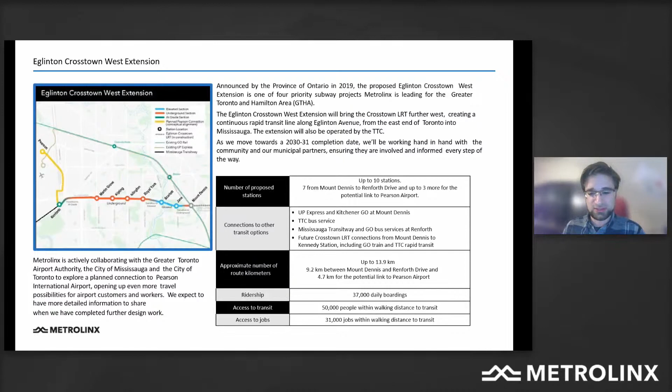So Chris, you can take us to the next slide.

One thing I didn't mention is that these are big projects, they do take a while to construct. Our planned opening date for the line is 2031. This gives you a sense of some of the timing. We've already passed a number of our milestones. Excited to announce that work on the tunnel contract, which is the tunneled section from Renforth through to just before Scarlett Road, we are just working with the final contractors to award that contract.

We expect work to begin at the launch shaft, the place where we insert the large tunnel boring machines into the ground, which is at Renforth, right at Renforth and Eglinton. We expect that if you go out there, probably at the beginning of summer, late spring, you'll start to see more and more activity as work begins on the tunnel launch shaft, working towards completion of that tunnel in 2025.

The next piece of work is building the stations, fitting out, adding the tracks and all the systems to make this a functioning rapid transit line, really getting started in earnest in 2025 towards that 2030-2031 opening date. Next slide, please.

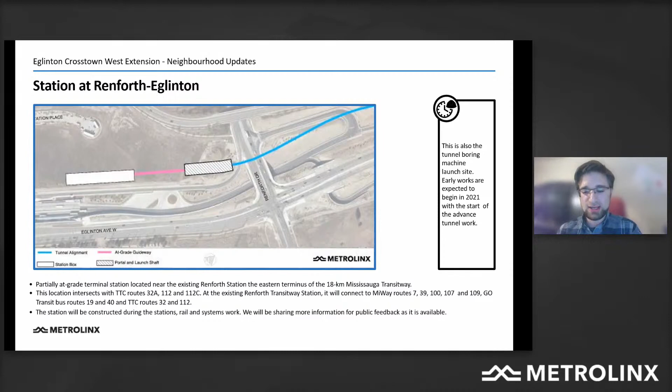In terms of this slide, this is at Renforth and Eglinton. This is where the launch shaft is for the tunnel boring machine, as well as the station that will connect very nicely to the MiWay buses, the TTC buses, and the GO buses, to be able to connect to or from broader locations in Mississauga, Brampton, and beyond. Next slide.

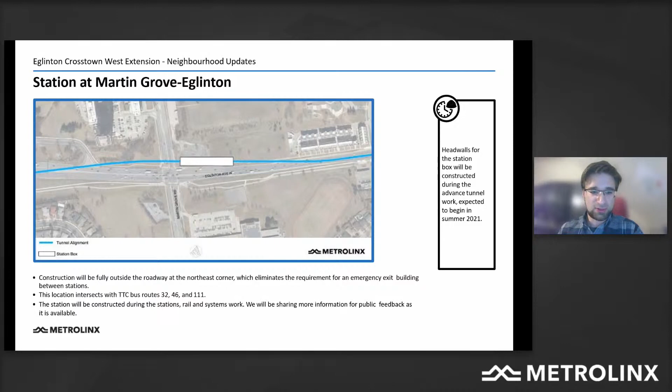So the blue line represents the tunnel, and that white rectangle represents where we'll be building the station box. This is Martin Grove. If you can take us to the next one.

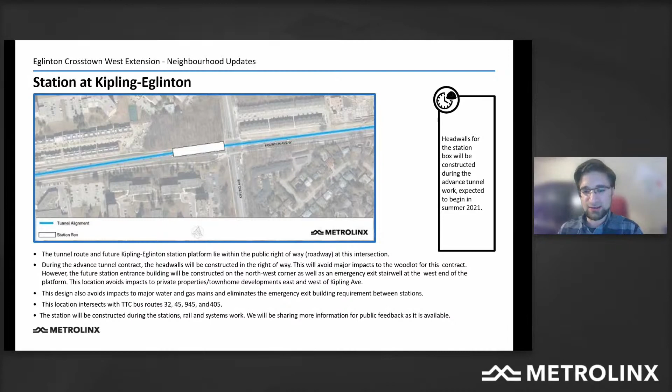At Kipling and Eglinton, this is the one location among the underground stations where the station box will be under the road. This is because of the adjacent townhomes and development, so we don't want to impact those through the tunnel construction. We keep the station box there, right under the road, just west of Kipling. So we can keep going.

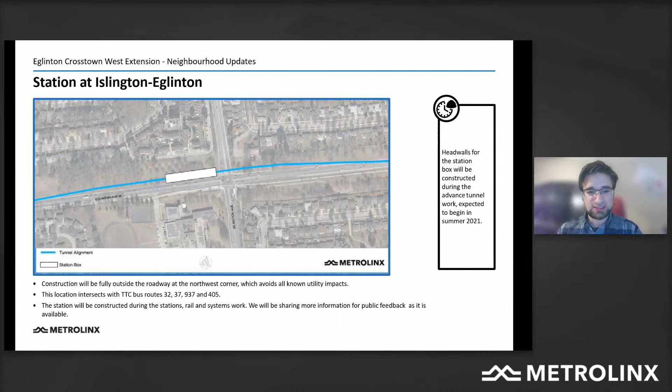This is at Islington and Eglinton, where we're planning to put the station box on the northwest corner. In each of these cases, we're doing work to make sure the stations are well connected to the surrounding development and to the north-south bus service. There are important TTC bus routes on all of these north-south streets, and we want a really good connection between the buses and the rapid transit stations so it's easy for riders to go between both services. This is Islington, and Chris, you can take us to the next one at Royal York.

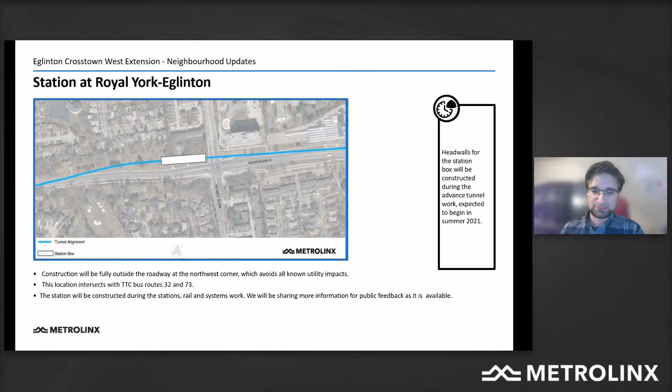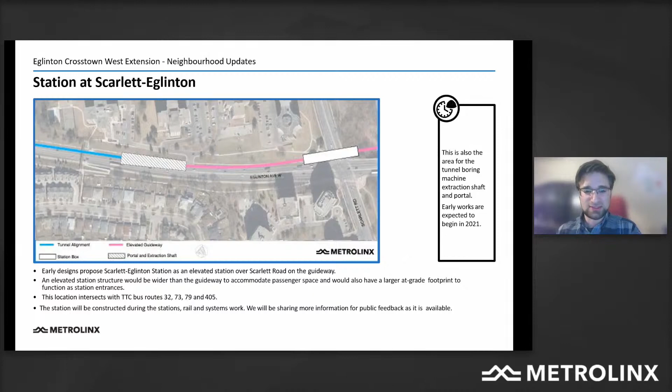The elevated alignment will be just north of the road, with an elevated station at Jane connecting to bus service there and the future RapidTO bus service that TTC and the City of Toronto are working on. Then the elevated guideway will go underground again for the last 600 meters or so through the Mount Dennis community, connecting with the Eglinton Crosstown LRT currently under construction.

One final point: we are planning for this to be a seamless, integrated service. There will be no forced transfer—these aren't two separate lines, this will be one integrated rapid transit line. So whether you're getting on at Jane or at Fairbank or Dufferin, you'll be able to go in either direction without having to get off the train.

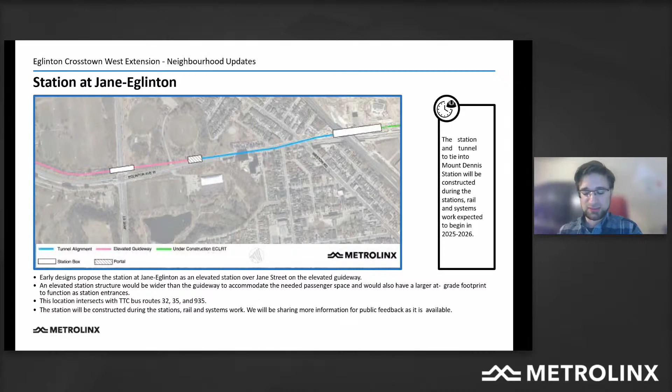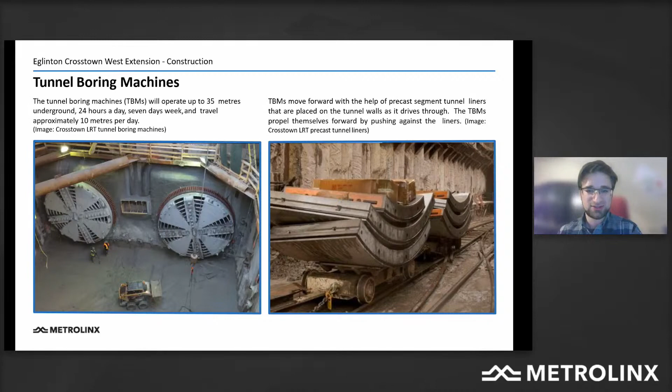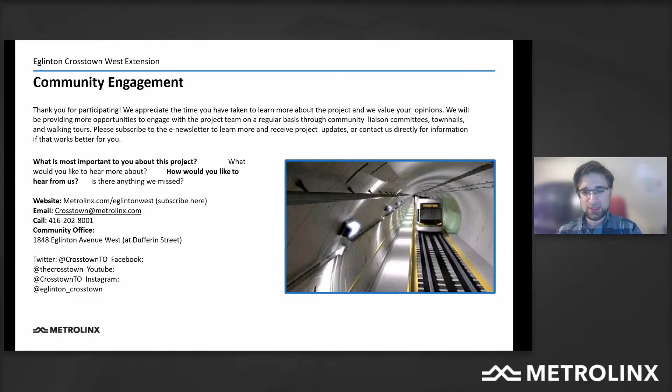So that's it for me, Joe, in terms of the presentation. As you can see, everyone, we are happy to describe this. We're still at the early stages of planning and design, and we're really looking forward through the course of this year to coming back to you with a lot more detail, so we can get your feedback on where the station buildings are, what they look like, all those kinds of things.

Well, thank you for that, Josh. Obviously, there is a lot of work on a lot of locations, and there's a fair number of questions. So we'll try and get through as many as we can. For those who have joined us, we're now going to do questions and answers based on the questions on the website. If you see a question you really want us to answer during the live session, please just upvote that.